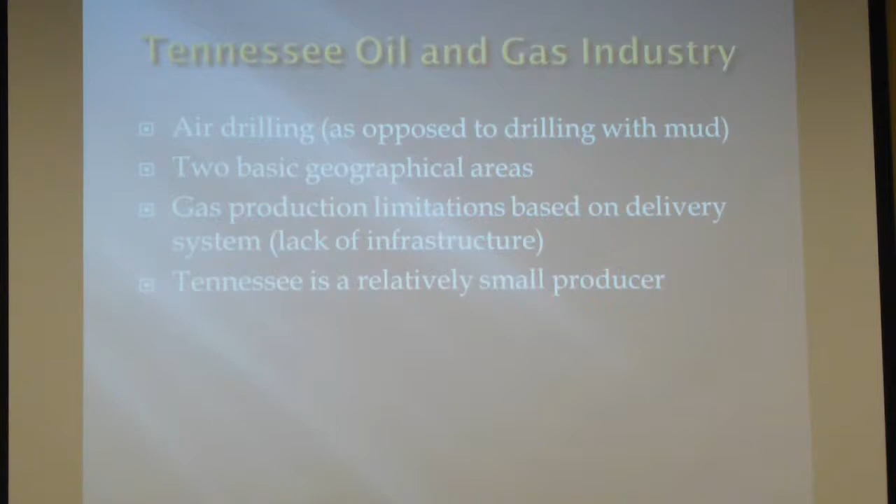Tennessee is a relatively small producer. There doesn't appear to be any boom on the horizon. This gives you an indication, relatively speaking, of the volume of permits issued over the last 13 years.

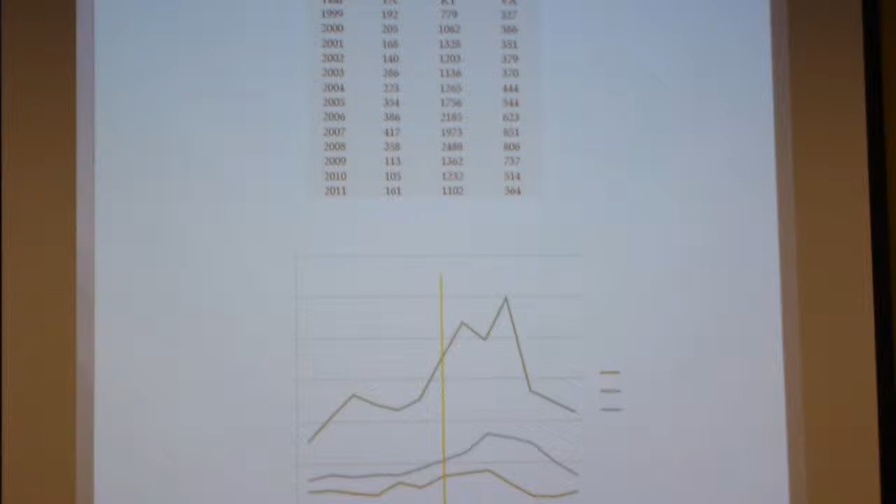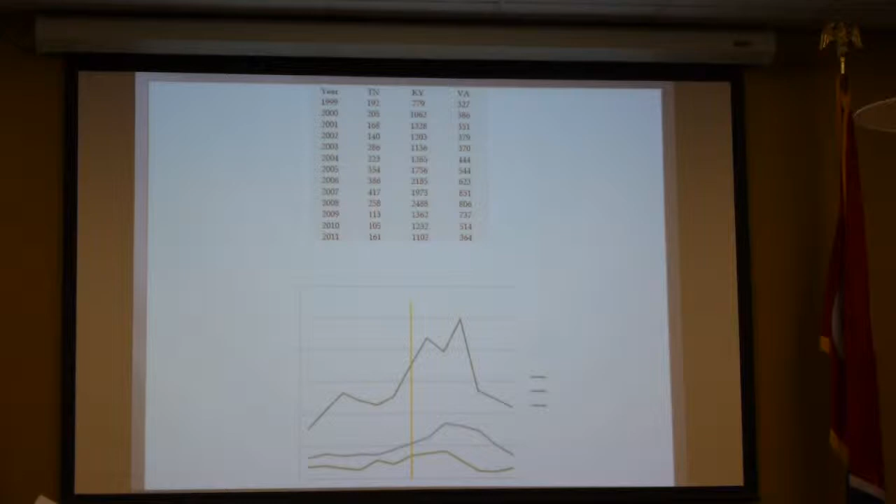Tennessee represents the bottom line on that graph. I apologize, some of the numbers didn't come up on that graph, but the purpose of the graph is to show Tennessee's level of participation compared to a couple of other local states, with Kentucky issuing many more permits. Now, why is that?

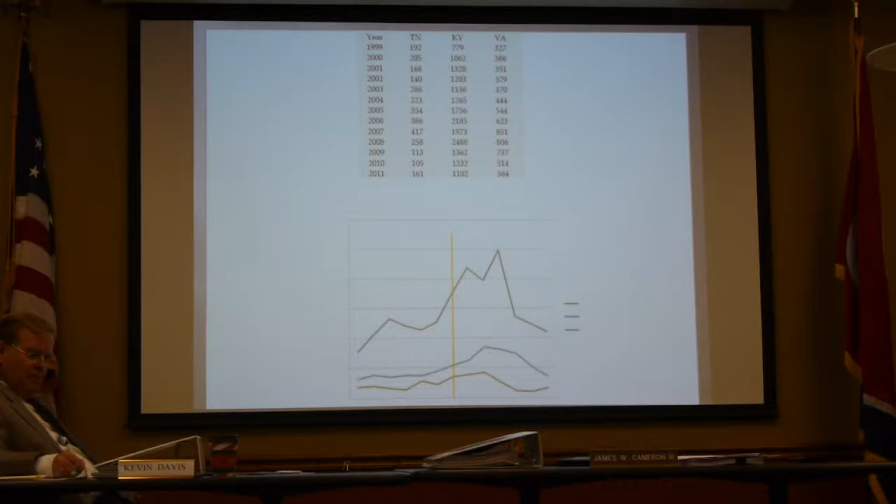From my perspective, they're closer to... let me go forward one. There are particular areas in the United States that lend themselves to natural gas and oil production. One of the largest of these is the Marcellus Shale in the Northeast, which extends down into Kentucky and Tennessee. There's some other basin activity, certainly more prevalent in Kentucky than in Tennessee, and that's one of the reasons why you see the numbers skewed toward Kentucky.

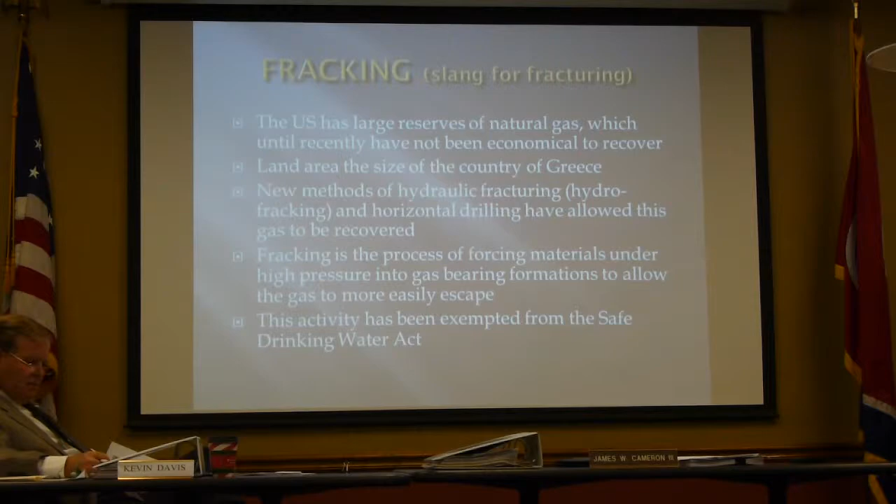The United States has large reserves of natural gas, and until recently these have not been practical or economical to recover. As I've said, one of the areas in the Northeast is roughly the size of the country of Greece. However, with the new methods of hydraulic fracturing coupled with horizontal drilling, this gas can be recovered much more practically and much more economically.

Fracking also has a number of different processes, all of which include forcing materials under high pressure into, in this case, gas-bearing formations to allow that gas to more easily escape.

I'm in the habit of developing analogies to help me better understand things, and a lot of you may appreciate this. You've got a cedar log laying on the floor. It may have a little aroma associated with it, but if you put a number of cuts in that cedar log, you're going to really sense the smell of cedar — you're really going to enhance the ability for that to escape that particular formation. It's an analogy that sometimes helps explain just what this fracturing is doing: it's allowing those gases to more easily escape and thus become producible.

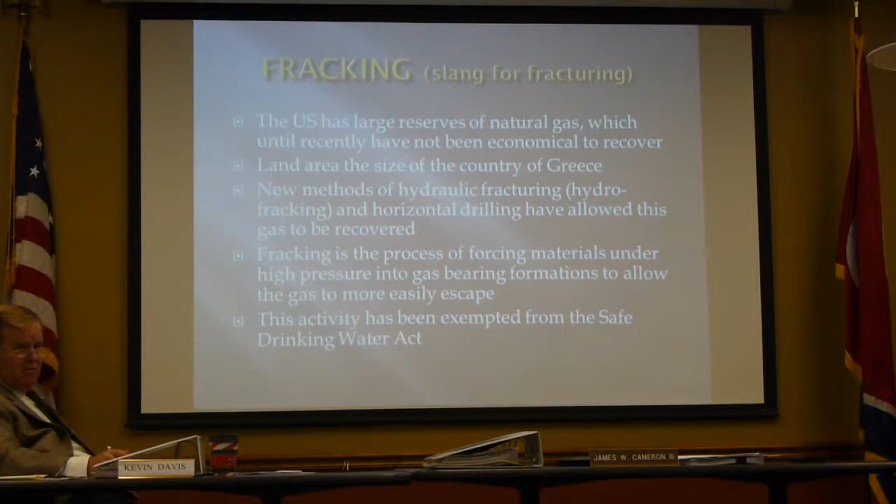But specifically, the oil and gas exploration fracturing fluids are exempt from the Safe Drinking Water Act.

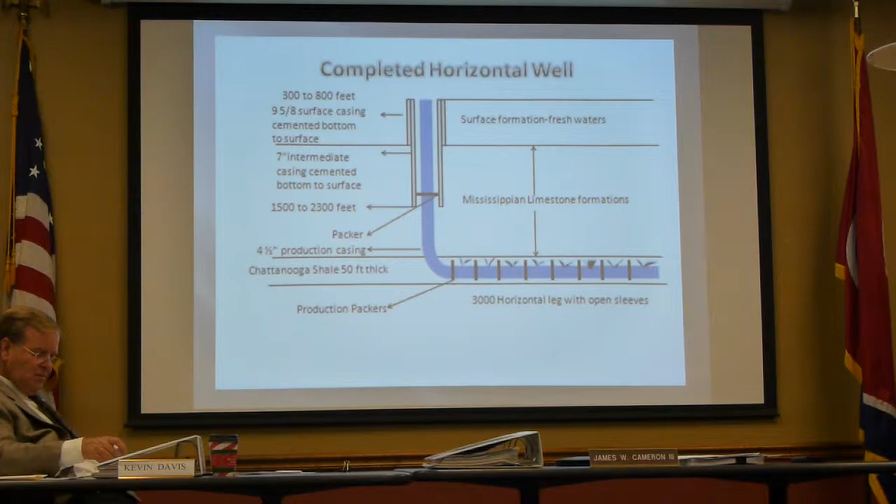This is a schematic, a very generalized schematic of a completed horizontal well. Some of the specific things I would point out are not so much related to the fracturing itself. What is perhaps more critical is how the wells are constructed. If you look at that first horizon indicated by surface formation, fresh waters...

The larger casing, the larger hole, will extend down past that—actually this schematic needs to have an extension down into the Mississippian limestone formation for that outermost casing. That's one of the things the rules as recently adopted require: an extension of 100 feet past any freshwater producing zone. So they've got that exterior casing.

After they drill that widest hole, they come back in and cement it up, particularly around the annular space between the well casing and the formation. Once that's set, they drill back through, in this depiction to around 1,500 to 2,300 feet, at which point they repeat the process of cementing the hole and drilling back through for the production casing.

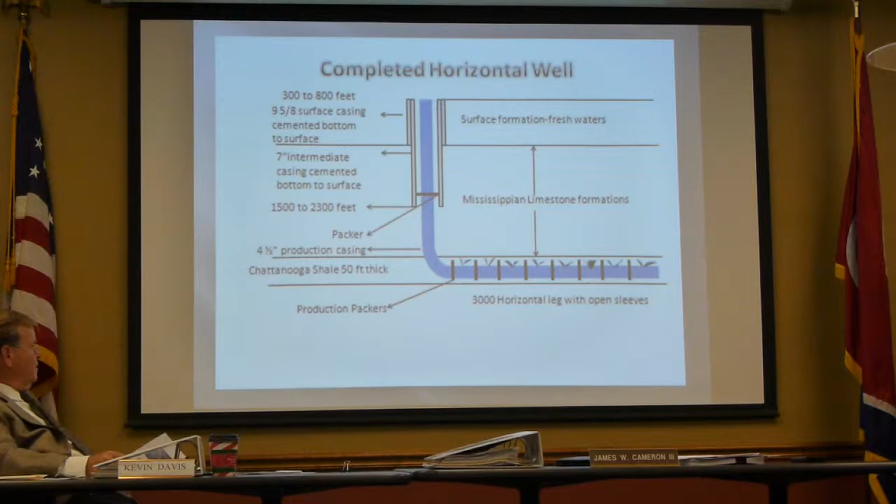Packers tend to isolate the zones, control where the cement goes, and also control where the fracture takes place. In this depiction, they're targeting the Chattanooga shale, and upon encountering that shale they begin drilling horizontally. The production packers allow the fracture to be focused within that part of the horizontal well. The packers basically expand and seal off that portion of the well such that your frac will be very specific as to where it takes place, then they move back, expand another packer, and fracture another section.

Ideally, what this does is provide much more entry of the natural gas back into the production casing and back to the surface.

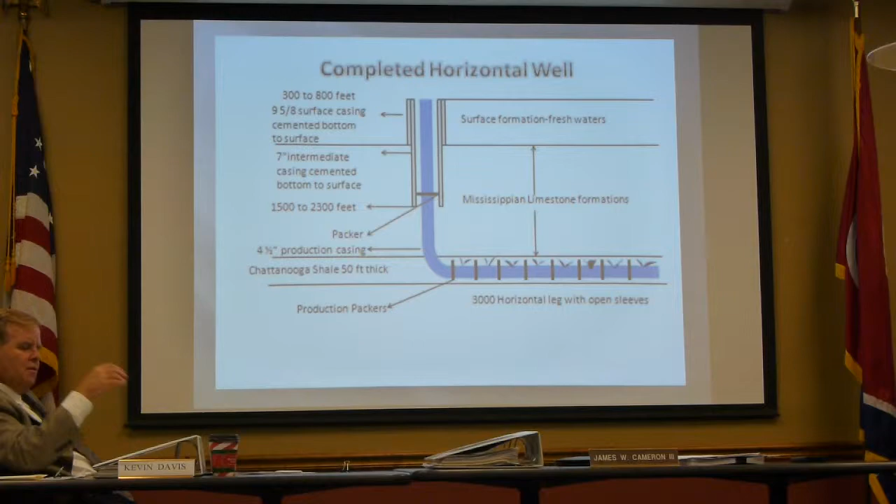What's extremely critical with respect to hydrofracturing, and just drilling and producing in general, is the quality of the isolation. What you're attempting to do is isolate this activity from impacting the surface water, but it's equally important for the industry to isolate water from the activity they're trying to capitalize on down in the formation. So it's not just that the rules attempt to force certain integrity of the well—it's inherent within the industry to have a well of that integrity to protect their investment.

Some discussions pertaining to hydrofracking. There had been problems associated with hydrofracking in the Marcellus Shale in Pennsylvania, West Virginia, and Ohio, and perhaps elsewhere, but those we're familiar with. Those, if I'm not mistaken, were the catalyst for the concern expressed by the legislature that I'll get into in another slide or two.

Now, to my knowledge, those problems, while not exclusive to well construction, are largely associated with how that return of hydrofracking water was managed on the surface. Perhaps not exclusively—I'm not aware of the extent of those problems.

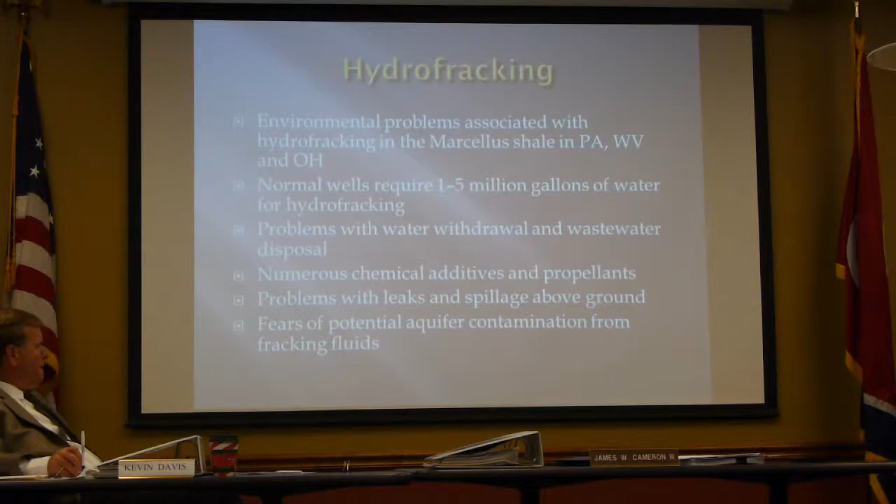As I mentioned, there are no large volume hydraulic fracks in Tennessee to date. The two largest were 172,000 and 145,000 gallons of water. And interestingly, as I've been told, both of those were counterproductive, in that the water tended to mask or inhibit the ability of the gas to escape from the very unit being targeted.

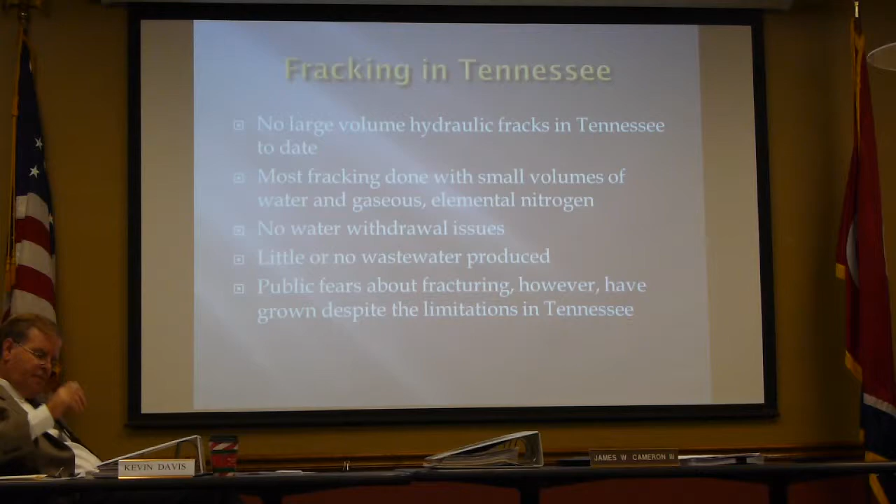Most of the fracking done in Tennessee is done with small volumes of water and nitrogen. Now, I'm not versed in just how that works, but the point being, we don't have the large volume hydraulic fracks—basically the methodology in Tennessee has taken a different track.

Very low water withdrawal issues. Again, most of the fracking jobs that have occurred have been small volume jobs. Nonetheless, there are still public fears about fracturing.

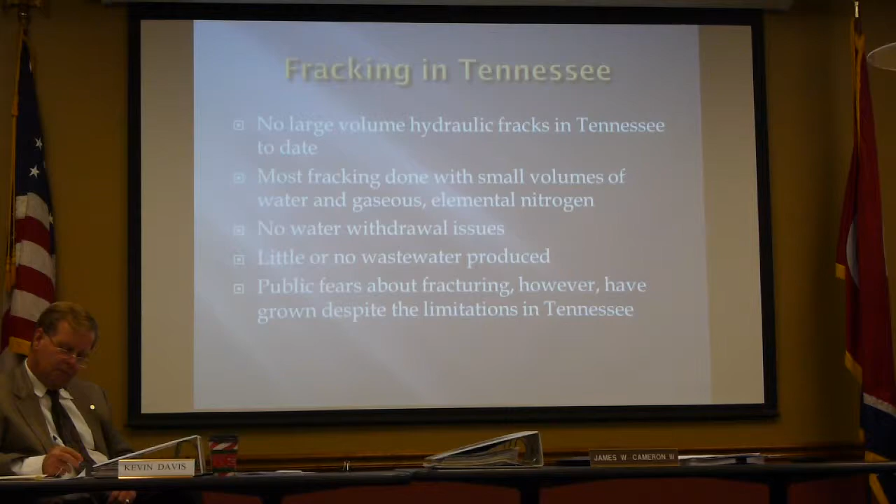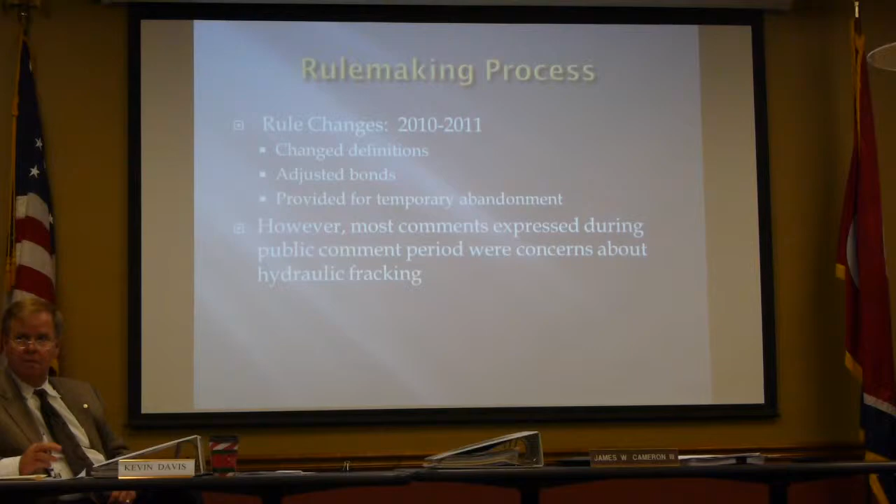The rulemaking process was initiated in 2010, 2011, and it was relatively minor in scope. Some definitions were proposed, we proposed to adjust some bond requirements, and we provided some rules for temporary abandonment of wells. During that comment period, however, most of the comments expressed were concerns about hydraulic fracturing, even though that wasn't a component of the proposed rule change at that time.

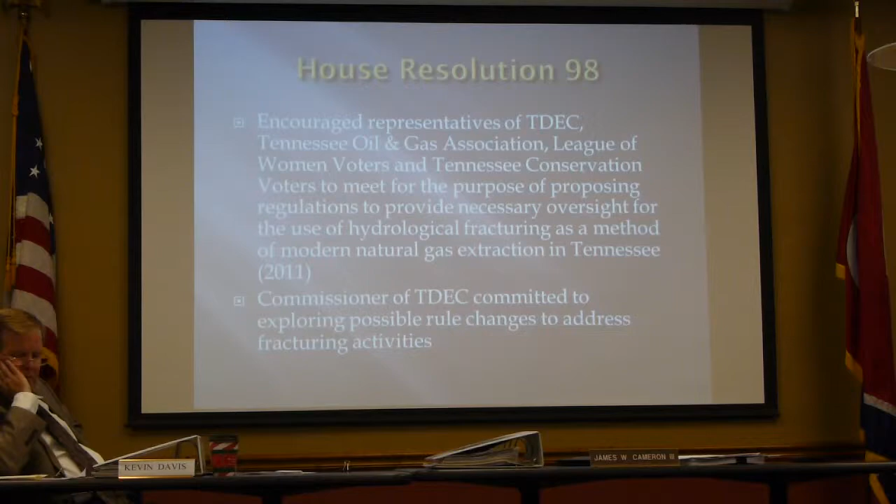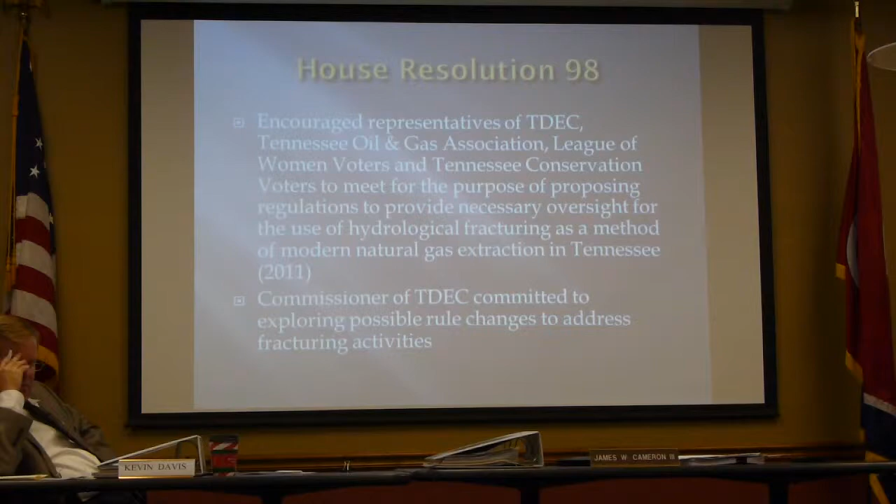House Resolution 98 was passed, which encouraged representatives of TDEC, the Tennessee Oil and Gas Association, the League of Women Voters, and the Tennessee Conservation Voters to meet for the purpose of proposing rules to provide the necessary oversight for the use of hydraulic fracturing as a method of modern natural gas extraction in Tennessee. The Commissioner of TDEC then committed himself and staff to exploring possible rule changes to address those activities.

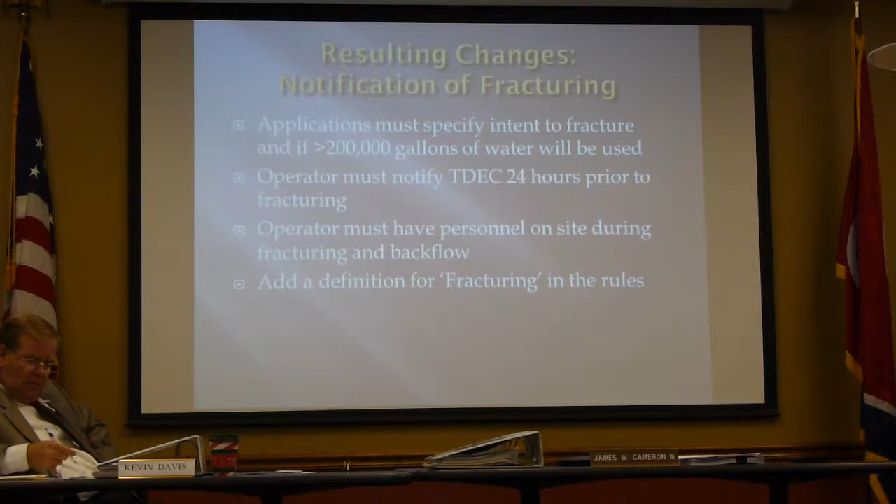Resulting changes in the rules: applications must specify the intent to fracture if greater than 200,000 gallons of water will be used. The operator must notify TDEC 24 hours prior to fracturing, must have personnel on site during fracturing and backflow, and we added a definition for fracturing in the rules.

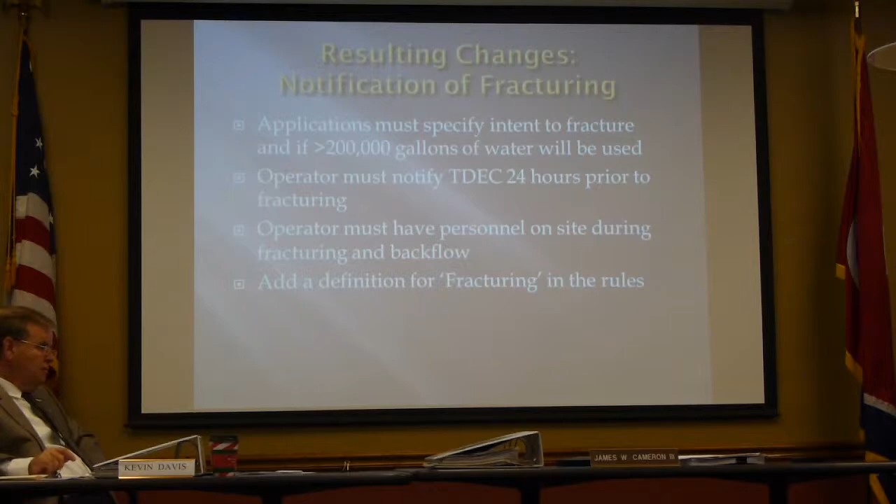Keep in mind that prior to this, fracturing wasn't prohibited. I don't want to say it was not regulated, but it wasn't addressed specifically in the rules. So this rule change has basically encompassed that concept, and I think has done a very good job of establishing the regulatory oversight framework for fracturing in Tennessee.

A 30-day public notice and comment period is required for all wells that are proposed to be fractured using greater than 200,000 gallons of water. All new well permits will be posted on TDEC's website.

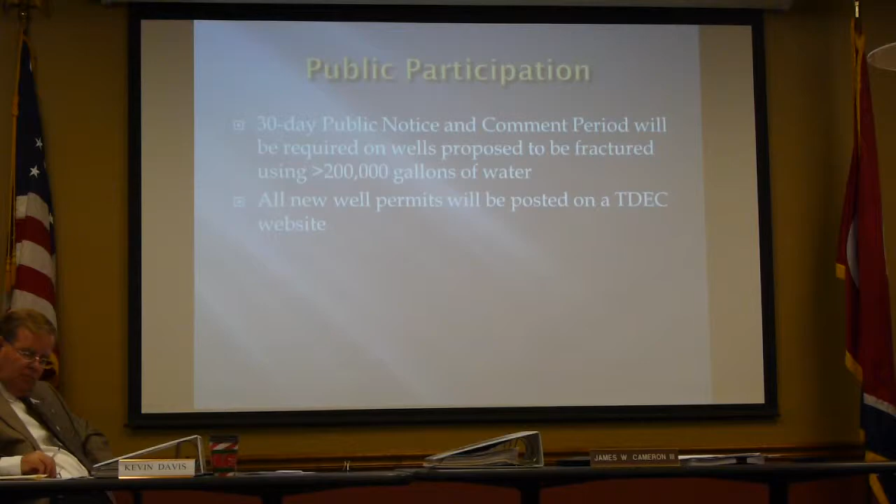Post-drilling well reports must include the actual volumes used to fracture, the amount and concentration of all additives used, the amount of wastewater generated, and the method of wastewater disposal. This is specific to all wells. The fracturing data used in wells that use greater than 200,000 gallons of water have to be entered onto a public database referred to as FracFocus within 60 to 120 days after completion. Trade secret protections are included and are basically beyond the scope of our rules to influence, and some of those do come into play.

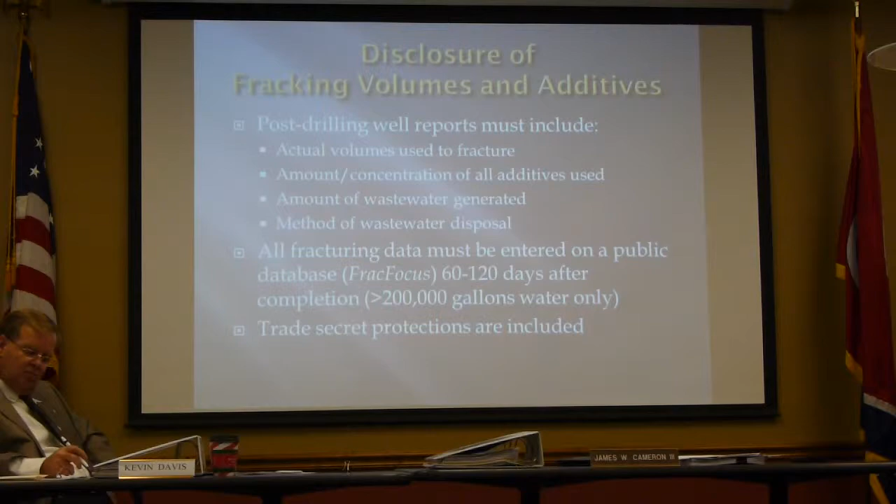Other changes to the rules involve integrity, and I feel like this is one of the most important ones. Integrity testing on all wells to be fractured, and wells proposed for temporary abandonment. Integrity testing, by and large done by pressure testing, is very important for determining the integrity of that well, to determine whether there's any leaks, and whether it is sound. Again, that's not solely a regulatory-initiated or supported activity. That's activity that's also critical for the industry to make sure that the wells they're building have the appropriate integrity so that they can hopefully realize the value of that well.

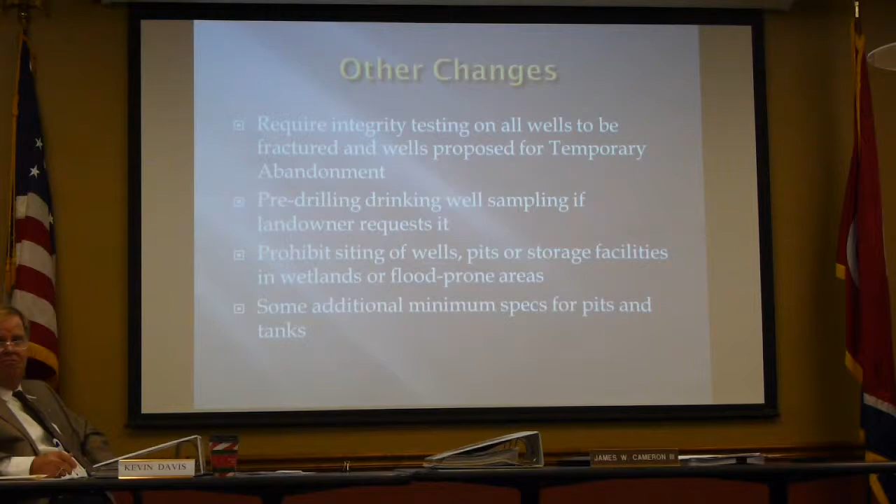Other changes: again, this applies to wells that are going to be fracked using over 200,000 gallons. If adjoining landowners request that their drinking water wells be sampled, these rules obligate that operator to provide that sampling. The objective of this is that you have a measure on record, and quite frankly, most operators are anxious to do this as well because they want to have on record a measure of the quality of water in that water well before they go about doing their drilling and or fracturing.

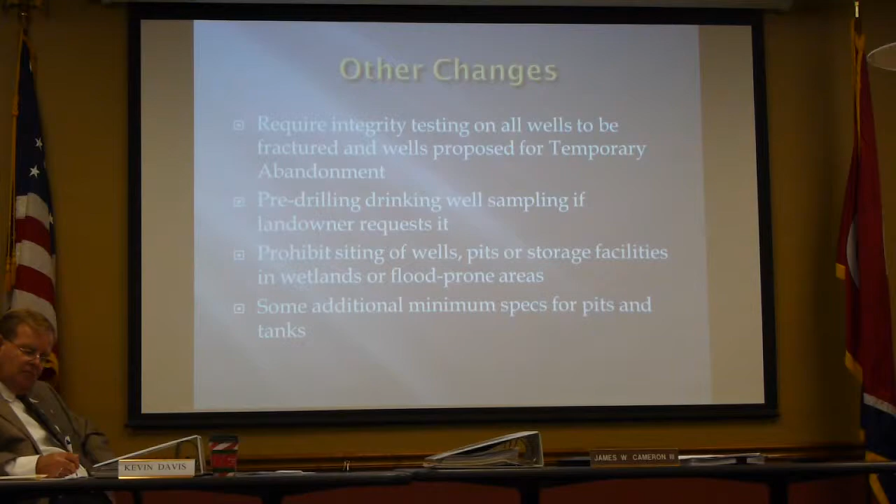Other parts of the rules prohibit the siting of wells, pits, or storage facilities in wetlands or flood-prone areas. There's also some additional minimum specifications for pits and tanks.

Other related notes: the Bureau of Land Management has proposed fracturing regulations on their land that are similar to Tennessee's rule. Likewise, the Department of Energy published suggestions to states on fracturing that are similar to Tennessee's rule. Currently, EPA is engaged in the study of fracturing issues, which will very likely result in a change in their rules that will then be directed to the states within the next couple of years.

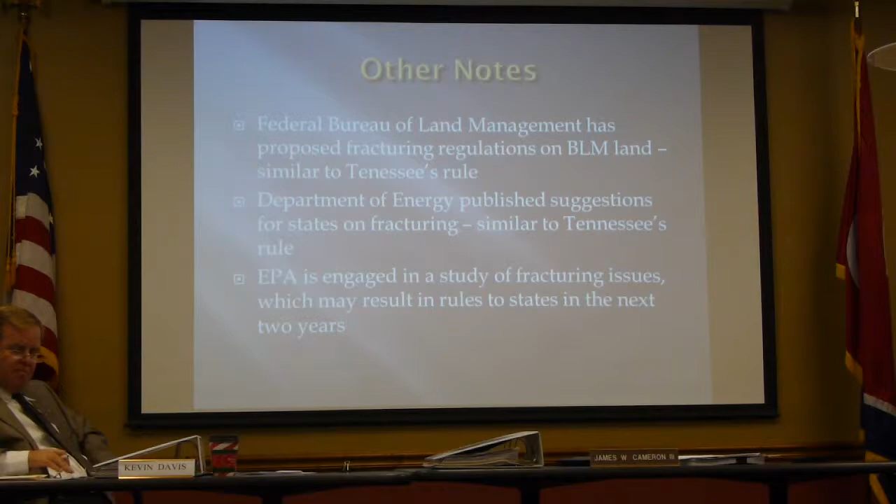That is the extent of that introductory presentation. I'll be happy to field any questions by the board. If I'm not able to answer them, I'll certainly call in somebody that is, or be glad to get back to you. Any members have any questions?

That allows us to effectively sample to determine if its impact is felt anywhere. Also, from the perspective of emergency situations, our rules require full disclosure. In other words, worker safety, that sort of thing, that people that are working on the site doing the fracturing, in the event that there's some type of medical emergency or something like that, then they're obligated to fully disclose.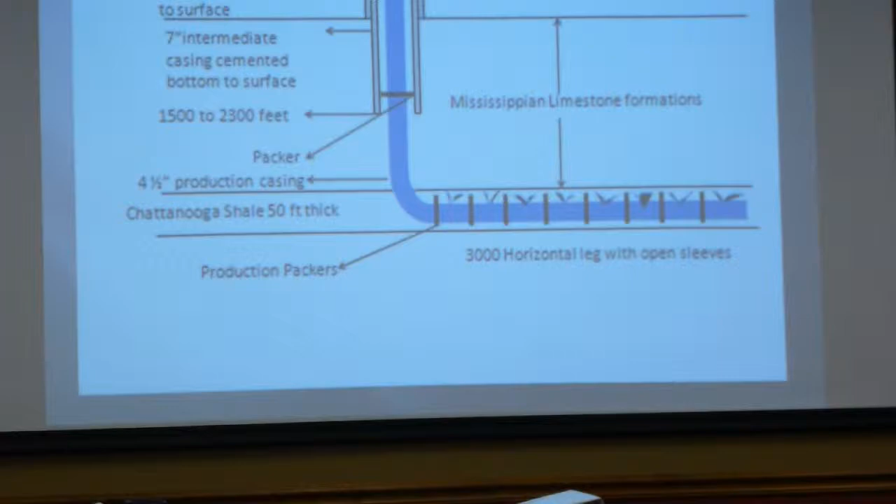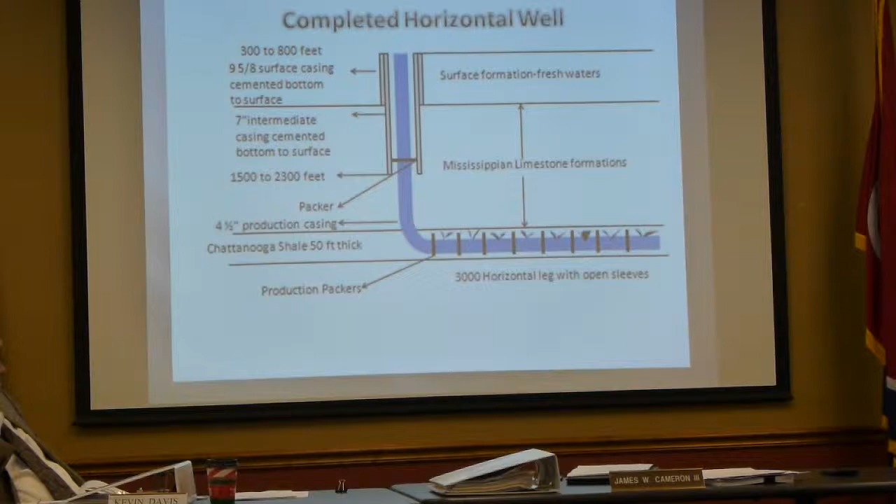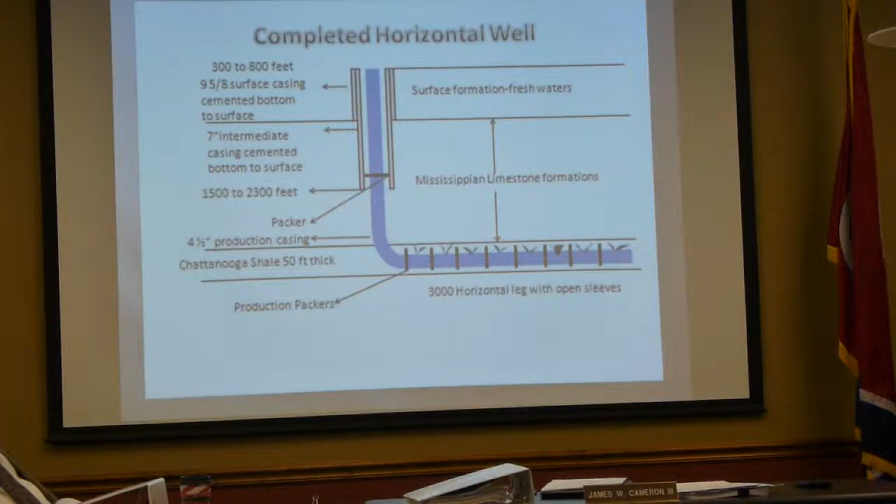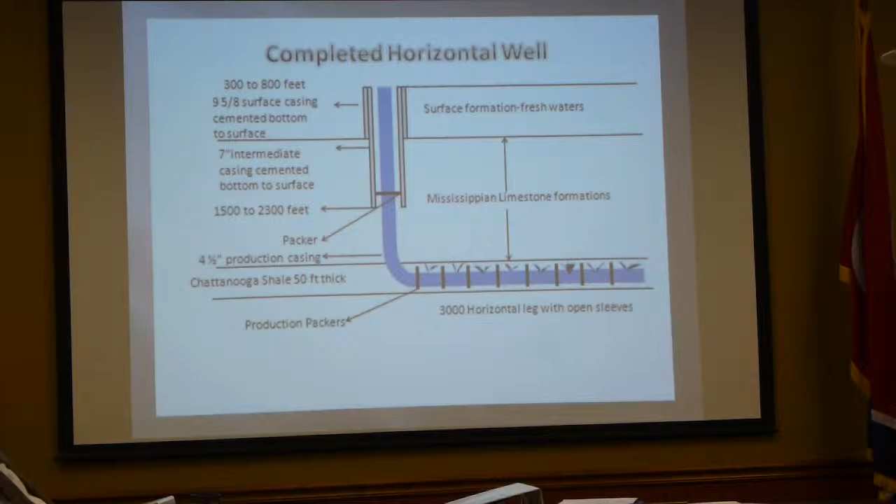What you got in that scenario, you've got two strings of pipe. The top string would be set 100 feet below the deepest freshwater formation and cemented back to surface. So you have a piece of pipe in there that has cement pumped down the pipe, and the cement comes up and cements the pipe in the hole and isolates that. Then the next string of pipe, same way - pump the cement down the pipe, back up to surface, and that cements that pipe in the hole. The picture you're seeing in blue, that would be your production casing, and that would be set.

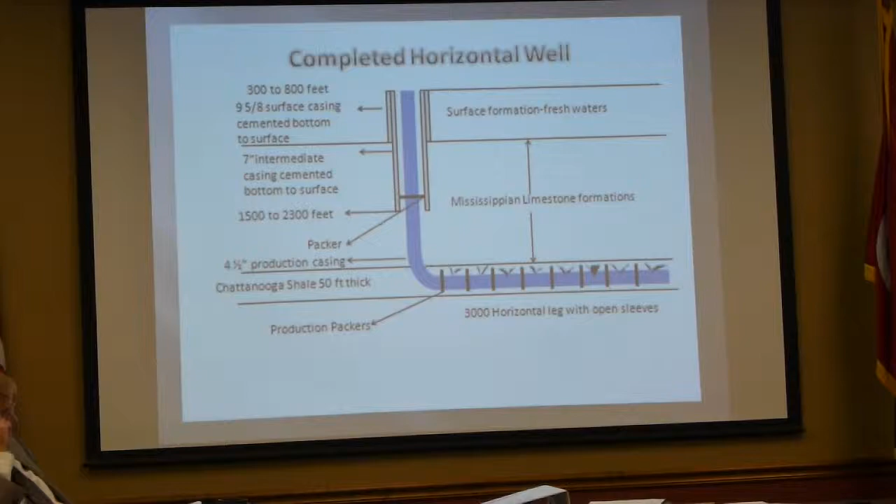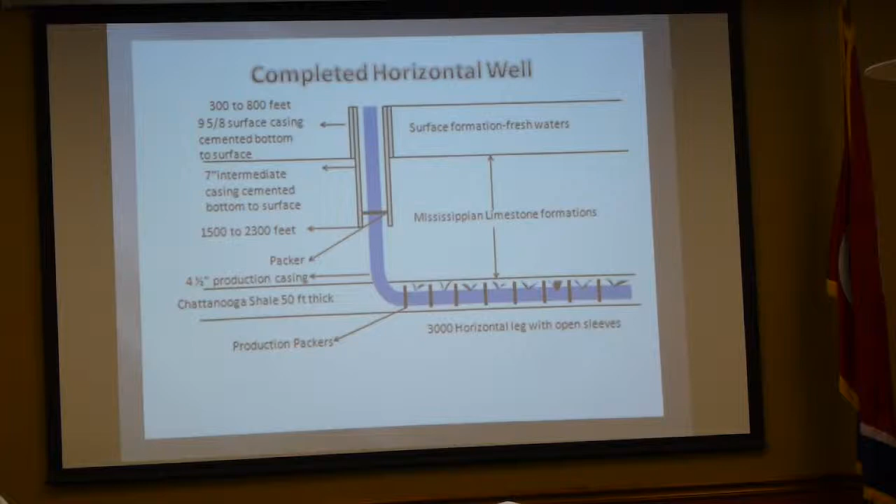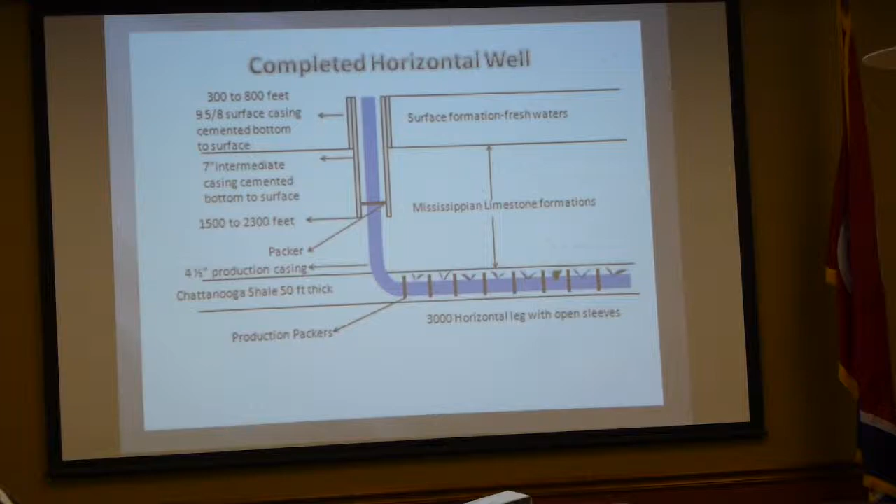There's a packer that isolates the open formation below the cemented pipe. That's the one that says packer at the top, and that's also a permanent packer that's used to seal off. The same type of packer would be used in a disposal, class 1 or class 2 disposal well, and that's used to isolate the producing formation from the annulus of that pipe.

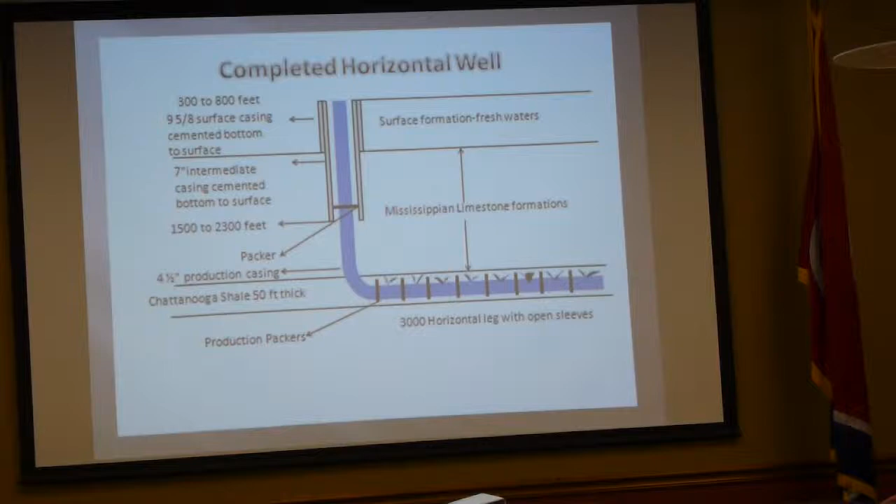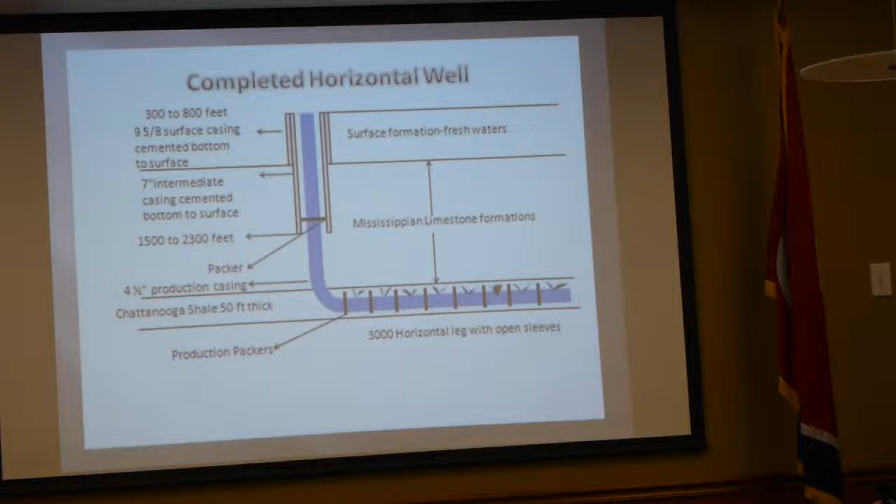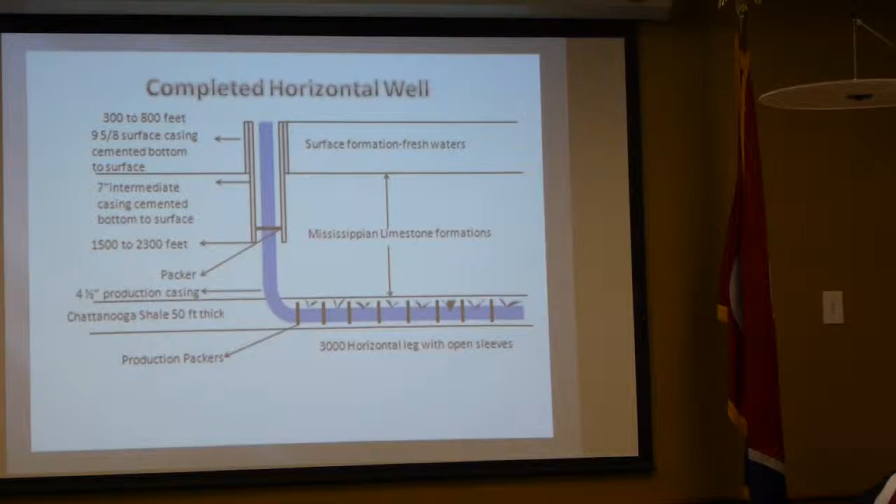And then these individual packers downhole, they're all set simultaneously, not individually. So when you pressure up the pipe, the bottom of the pipe is plugged off. When you apply pressure inside that pipe, the elements on those packers expand, and then they shift the sleeve that seals off the port from the inside of the pipe to the packers. And those packers now seal off each one of those individual zones that you would go in and frack.

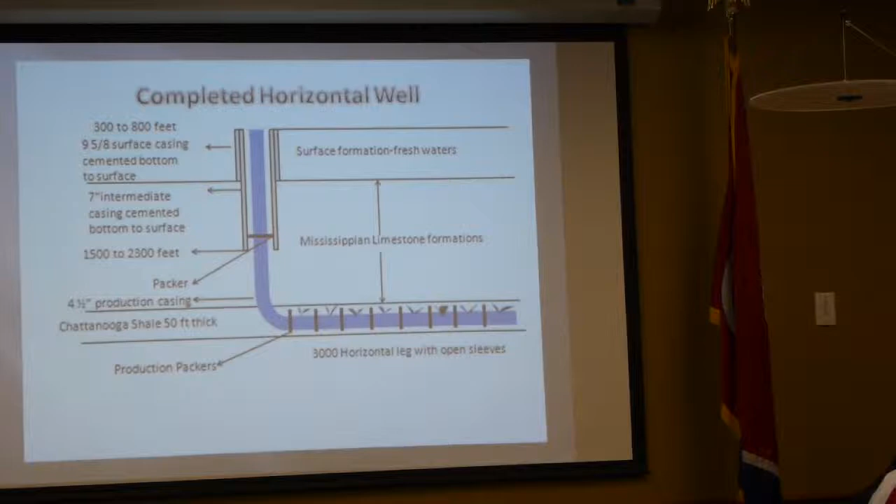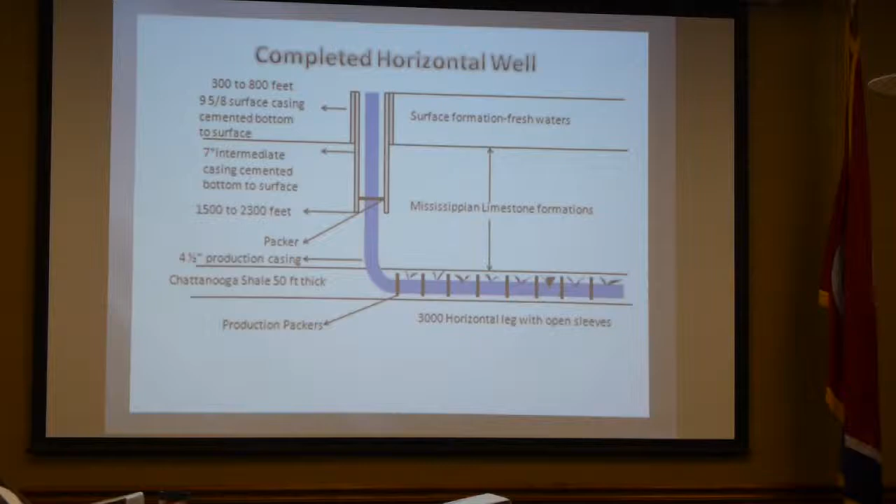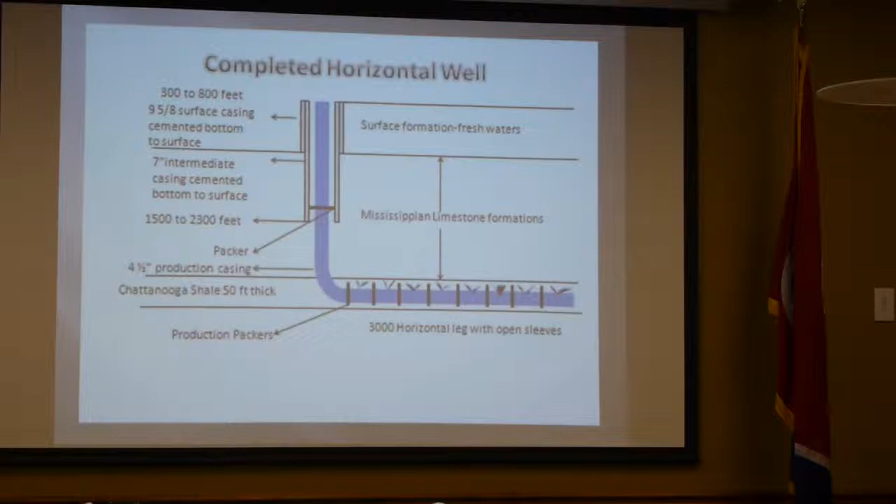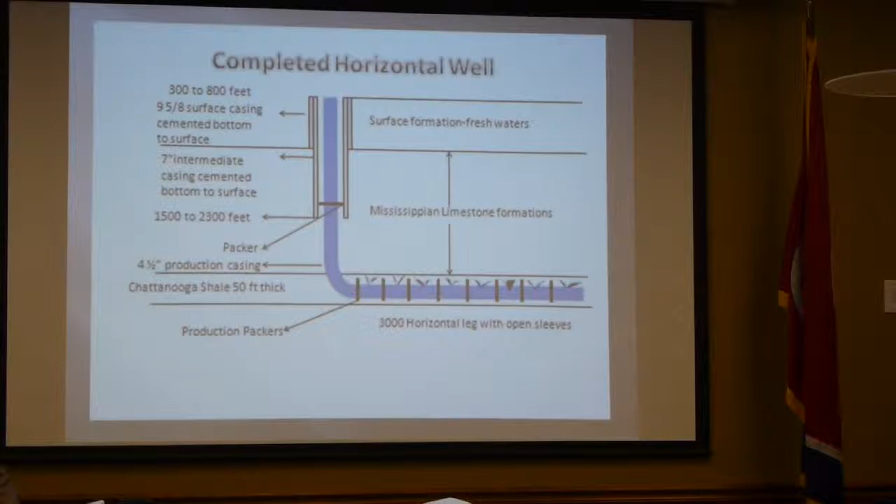Now there's also a sleeve in between those packers, and when you frack these in stages, there are different ways of doing this, but generally you drop a series of balls down there, from a small ball to a big one, and they're graduated. The first ball you drop opens that first sleeve, and you're able to pump out the first sleeve, and you're isolated by the packer from all the remaining sleeves. You typically go from the toe back up the hole, and then you drop a ball and seal those ports off, pressure up and open the next set of ports, and you're able to frack stage 2. You continue to drop balls and do the same thing for as many stages as you want to frack. The physics behind this technology was developed a long time ago.

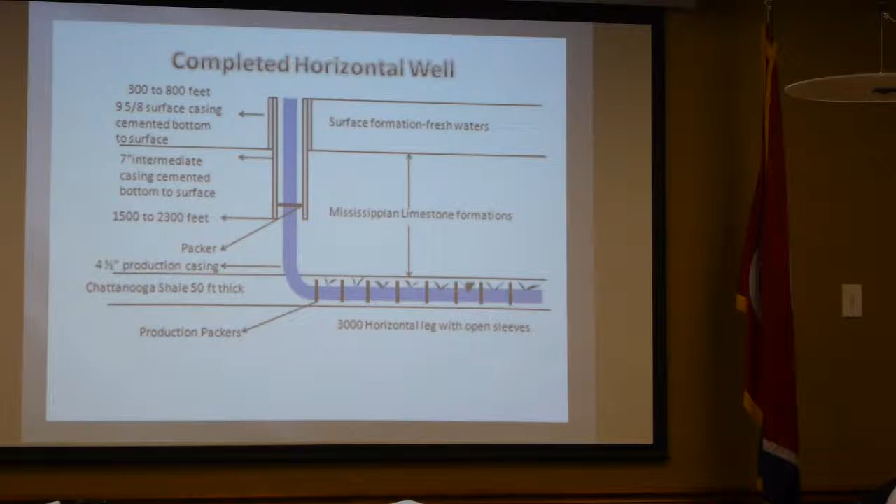This is nothing new. The horizontal drilling process is what's new. The fracturing technology is the same fracturing we've done since 1947 when the first job was done, only with modifications, enhancements, and a lot of engineering and science behind it.

If you ran 10 stages, it would basically be similar to drilling 10 vertical wells and fracking 10 vertical wells individually. It's the same thing happening. You're not creating anything new; the rock and the physical properties around it designate whether your frac goes 100 feet or 200 feet long.

If you picture this formation as all under pressure, the industry does not want to frack out of zone. You have many zones between the zone you're targeting and the surface water. If you frack out of zone, it's under pressure and you lose your product. You have no asset. So it's in the industry's best interest not to frack out of zone, and that's why they've spent millions, billions, trillions of dollars trying to design and understand how to apply the necessary hydraulic fracturing to produce the most gas and fluid out of these wells.